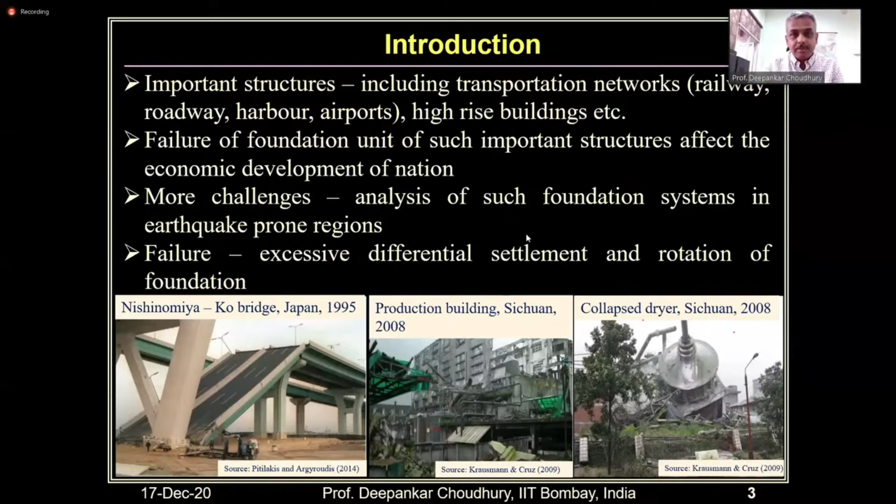We also know how the foundation unit is quite extensive. It is not that we only talk about building foundations as a geotechnical engineer, but we also talk about excavation close to existing structures or buildings, even tunnels, and so many other things also come under the domain of foundation engineering. We all are aware about it.

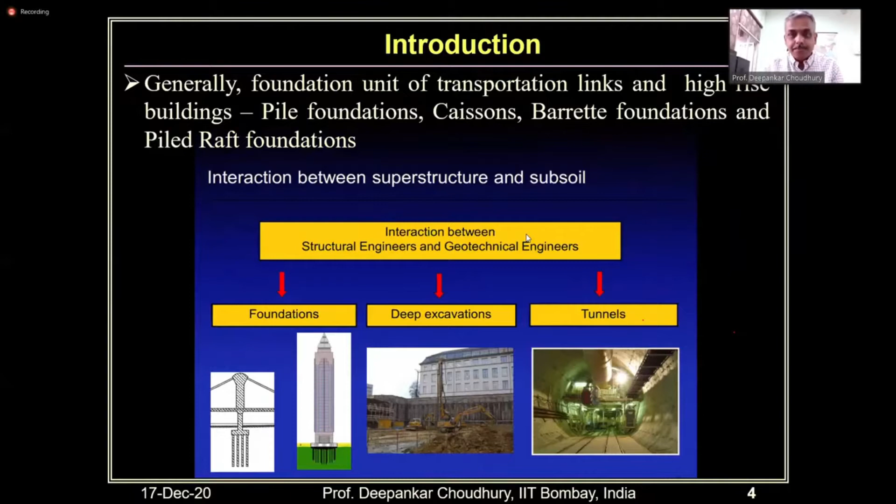And with the ongoing construction boom worldwide, we all know that super tall towers are essentially a present day scenario in urban cities. Across the world, we can see and are aware about this increase in the height of buildings.

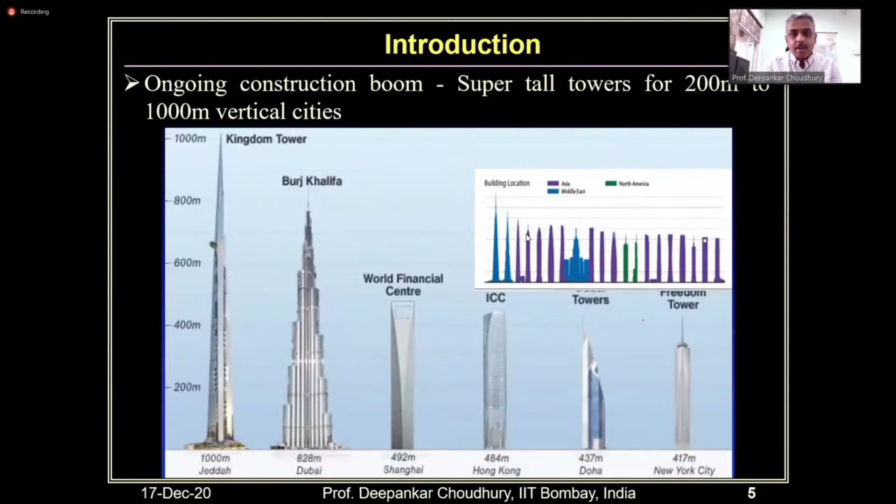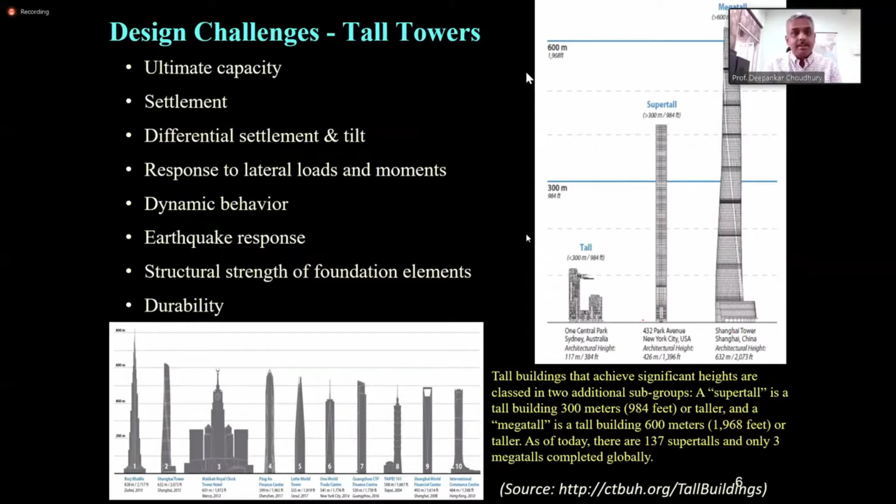Coming to this, what are the various challenges we face when we talk about such heavy or tall structures? Essentially, of course, its capacity, then settlement, differential settlement in terms of tilt, response to lateral load, moments - all these are parameters which we have to take care of as a foundation engineer. When it comes to earthquake-prone regions, additional parameters like the dynamic behavior of the foundation system, the earthquake response of the foundation, and structural strength of the foundation elements additionally get added to the challenges for which, as geotechnical engineers, we are supposed to provide solutions.

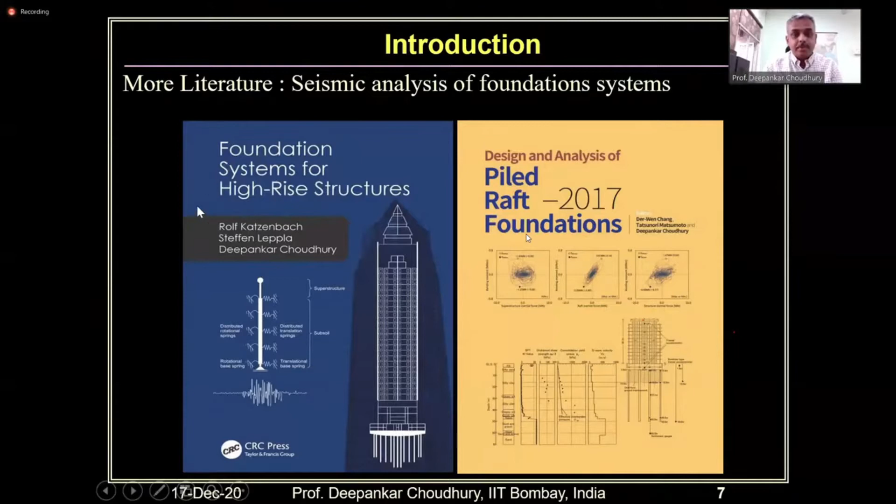Now, if we see the various literature available on this similar topic, I just want to highlight this book, where we tried to give the dynamic response of various foundation systems for high-rise structures. One can see through that.

Coming to the modalities of addressing this problem - how to address whether the foundation or the building or the structure which we are going to have is in a seismically low risk area, moderate risk area, or high risk area - is probably the fundamental thing we need to first identify. Because based on this identification, what types of testing we should start is very important.

I remember this morning, towards the end in conclusion, Professor Sitharam was mentioning that essentially geotechnical analysis and design, everything, the fundamental basic thing depends on major quality testing. He actually asked Professor Charles Ng that probably ISSMGE can take a lead in the form of the type of testing we give. So this is very important as well.

When it comes to seismically active areas, accordingly, whether it is only in-situ testing, or in-situ plus combined high quality undisturbed sample collection and then laboratory testing and site specific correlations - all these are essentially important to address.

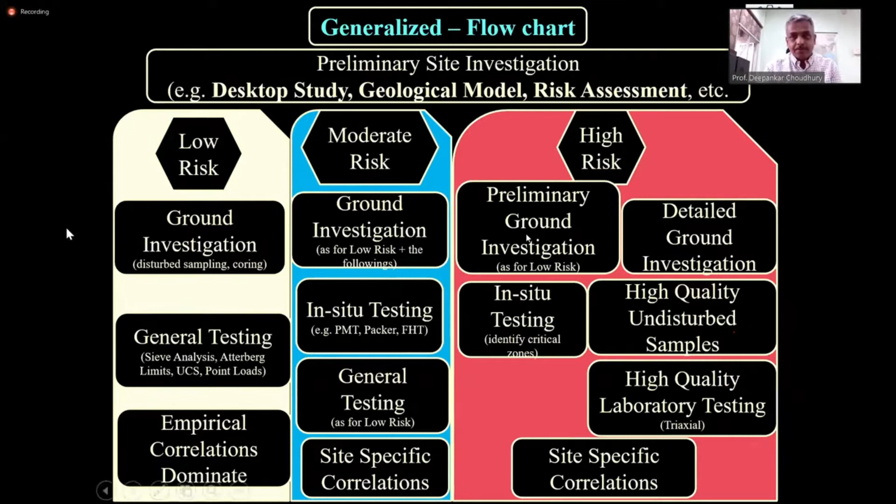So this essentially falls on the shoulder of geotechnical engineers or geotechnical earthquake engineers to check what type of degradation of that shear modulus is occurring in the range of cyclic shear strain to which your structure is subjected, or to which you want your structure to be designed. So essentially the stiffness parameter, damping parameters, Poisson's ratio, density of material - all these are important along with these things.

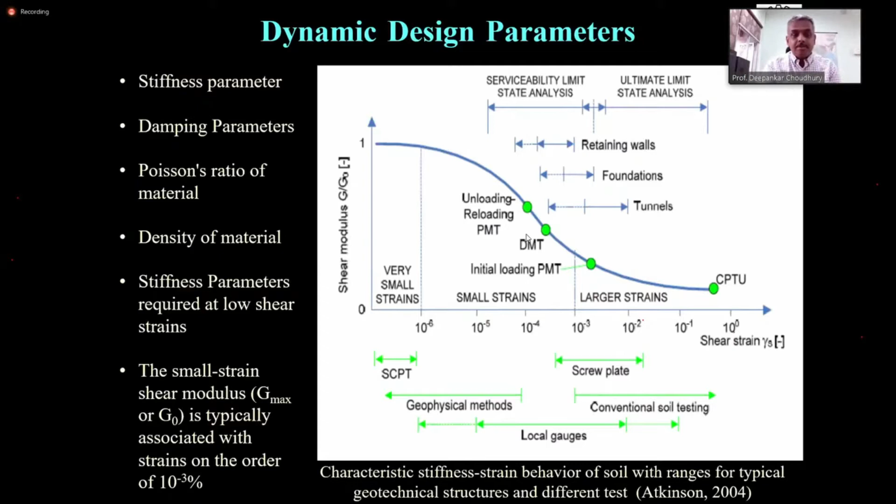Now, coming to the various components - essentially in today's talk I try to touch three aspects of foundation systems. This is the first case, the first foundation system which I am trying to present over here: foundation system one, which is pile foundation.

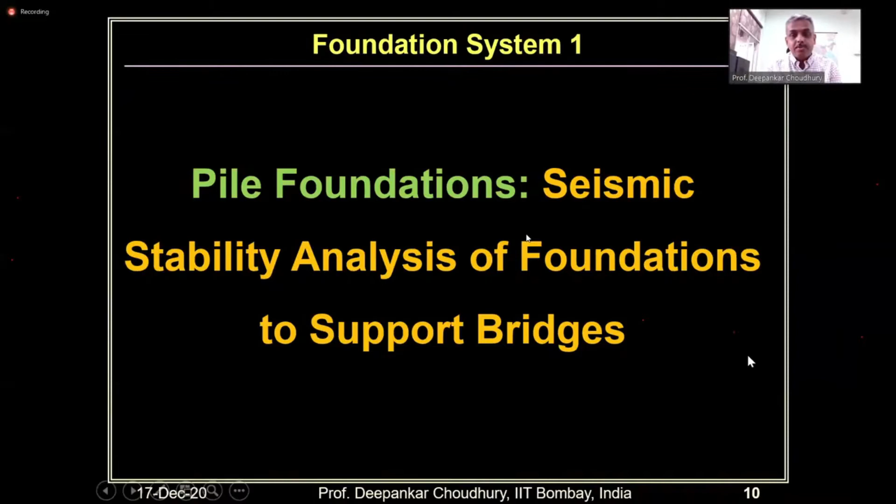We all know about how pile foundations need to be designed in earthquake-prone areas, etc., so I am not going into the theoretical detail of it. What I am trying to highlight today is a recent mega project in which we were involved - that project only, I am going to tell you how we addressed or solved this design problem of seismic stability of foundations to support bridges.

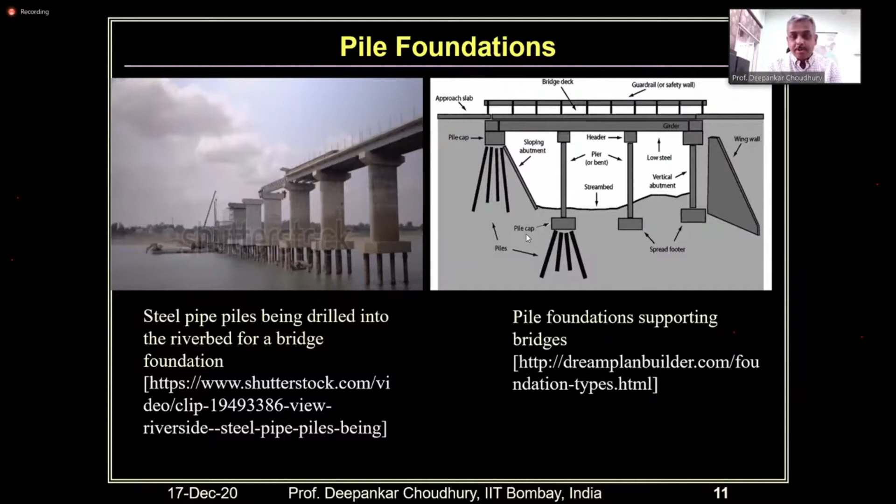As I said, I'm not going into the fundamental details of pile foundation because today's lecture is not on that essentially. So I am going to talk about this project which we handled at IIT Bombay, given by L&T, heavy structures and geostructure divisions of L&T.

This is the foundation for the Mumbai Trans-Harbour Link, MTHL, package one. There are three packages altogether. Remember, this is India's longest sea bridge, currently under construction, which will be 21.8 kilometers long. This is an MMRDA project, and various agencies and institutes are involved.

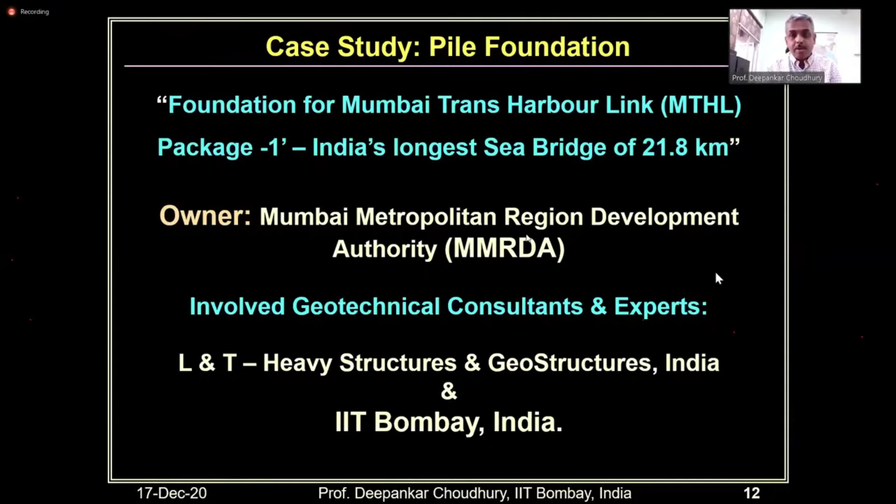I heard about this project in its preliminary phase when I was visiting Incheon National University in Korea with Professor Issy Shin. He mentioned and showed in a Korean newspaper that various companies were bidding for this project construction. Finally, L&T got it, and L&T Heavy Structure approached me for the seismic design component.

If you see the geographical location of this project, the Mumbai Trans-Harbour Link essentially connects these two islands. Mumbai is composed of 7 old islands, as you may know. So this connects Navi Mumbai and Mumbai, and this will be India's longest bridge, 21.8 kilometers, starting from South Mumbai's Sewri to Thane Creek to the north Elephanta Island.

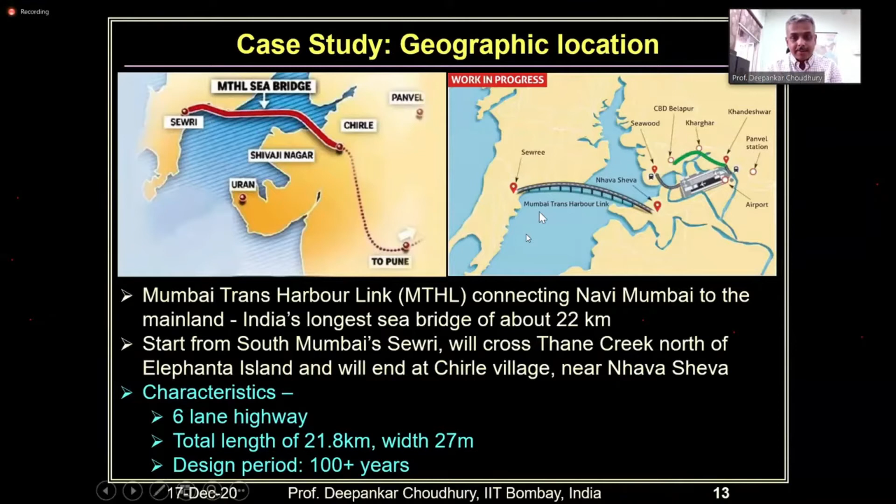I have visited the site also along with my students, and they found it a beautiful scenario. When it gets completed, you can see some part of the Elephanta Cave hill from this bridge. This will significantly reduce the traffic of Mumbai and the travel path also.

The architect of present day Mumbai city, as everyone knows, engineer Wilbur Smith, in '63 itself proposed this project, which at that time was named Uran Bridge. It was required for the development of Mumbai, and the cost estimation at that time was about 96 crore. But unfortunately, over the last 40 years, it could not materialize.

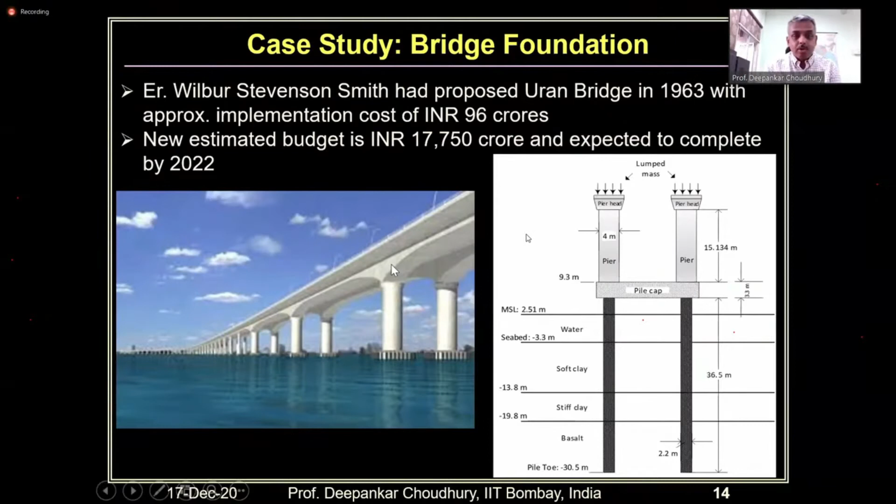Finally, the government decided that yes, it is very much essential for Mumbai. That's why the new estimated budget is several times higher after all those years. It is expected to get completed now by 2022. Actually, the pier level construction is all done.

If you see the soil profile, supplied by L&T to us when we were asked to do the seismic design, this shows the various layers. You can see the actual depth, very soft silty clay. Essentially, it is the creek region of Arabian Sea, so you can understand the standing water is there. Then you have very soft silty clay, then stiff clay, then residual soil.

In the Mumbai region, as you all know, probably at a relatively shallower depth than other areas like Chennai or Kochi, you get the rock at a shallower depth, about 17 to 20 meters or 25 meters, where you essentially get highly weathered basalt and such.

So now we started to classify the soil in terms of our dynamic analysis, and there we faced several challenges. As I mentioned, geotechnical testing is not given importance in many places, even in such an important case. They had done only SPT test, so only SPT N value was available. I asked whether they had done any kind of seismic survey test - no, nothing was available. So we had to estimate from available correlations worldwide what the various shear wave velocity values could be, and accordingly what the IS code classification would be.

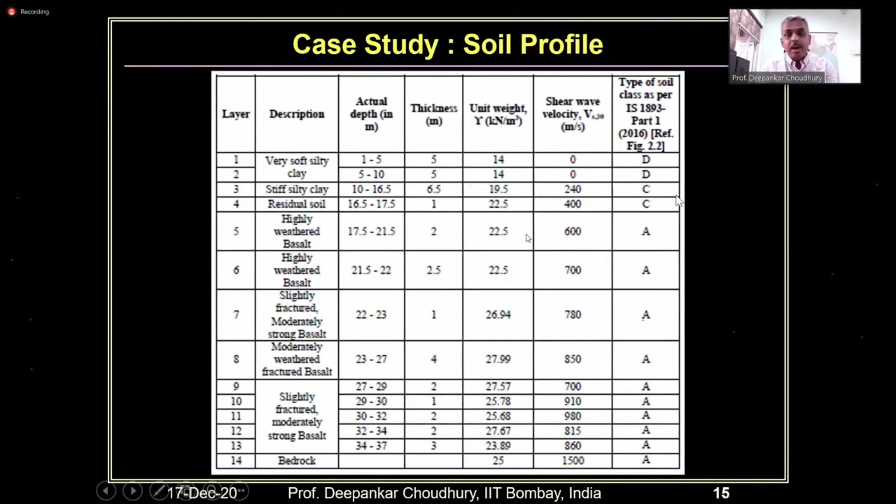The latest IS code fortunately gives the classification of soil based on something similar to the NEHRP guideline - class A, class B, class C, class D type of soil. Then we analyzed this MTHL project in two parts: seismic analysis via site response analysis using Shake 2000, and then we did the entire dynamic soil structure interaction analysis for the complete bridge foundation system using finite element software Plaxis. As you know, Mumbai is in seismic zone 3 as per IS code.

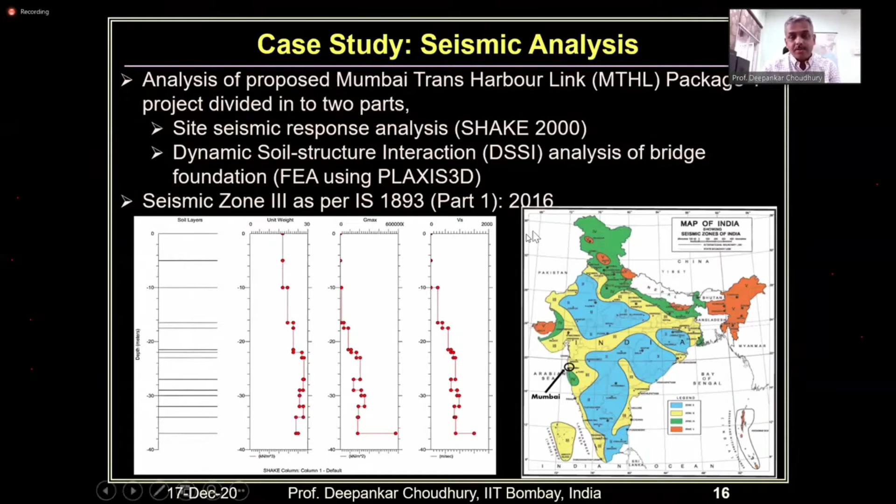These are the 8 earthquake ground motions that were given to us, developed by NGRI. NGRI did the initial seismic ground motion analysis for the site, and they gave 4 horizontal motions and 4 vertical motions for which the design of the foundation needed to be done.

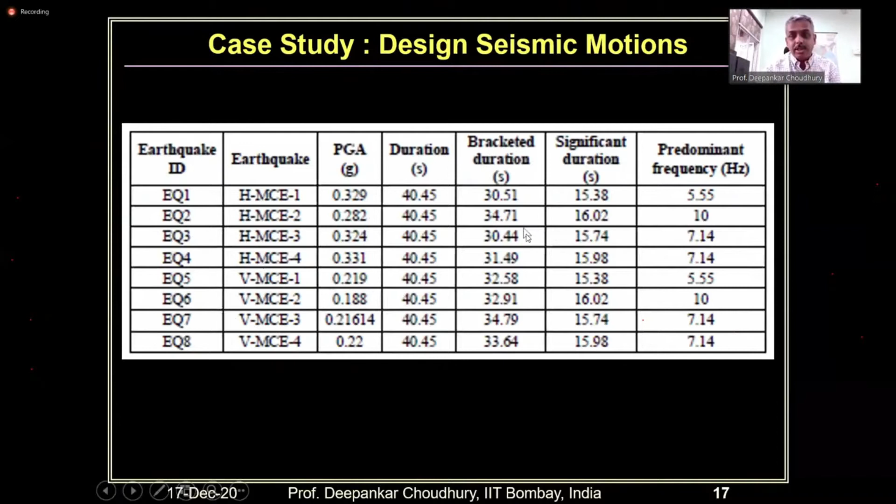So you can see over here the various values of PGA, duration, bracketed duration, predominant frequency, and so on. We carried out this one-dimensional equivalent linear analysis for in SHAKE, and identified the influence of amplification, since this is the creek region with very soft clay material, and we all know about Mexico City and other earthquake disasters. So amplification comes as an important parameter to consider in the design, along with damping factors, cyclic shear strain, and modulus degradation, which I mentioned earlier.

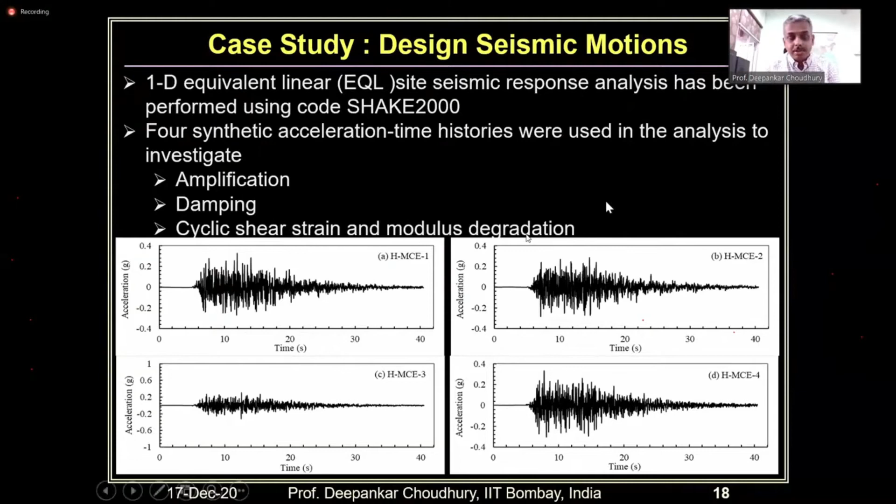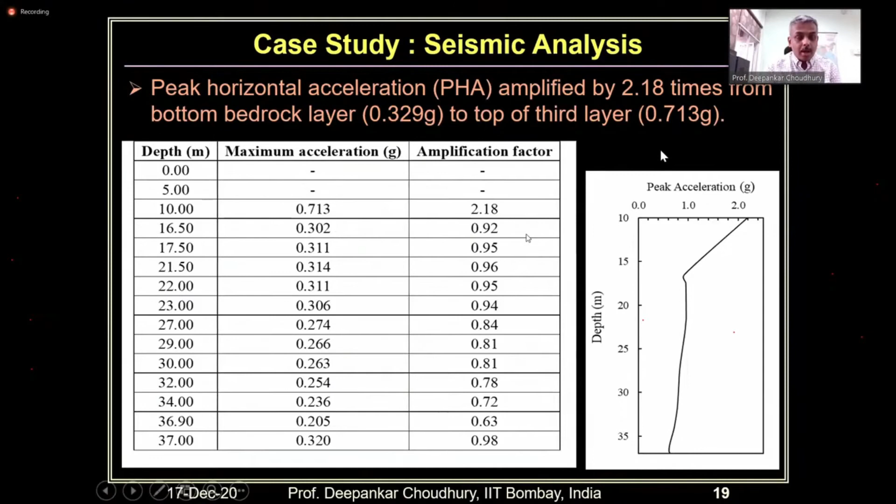After all our studies and analysis, we found a maximum amplification of about 2.18 times from the bedrock motion, depending on the worst case scenario of the ground motions that NGRI developed for the site-specific study for this project.

Then, after finding this out, the next study is the dynamic soil structure interaction for the entire foundation. The initial design for this foundation was done, and they asked us to check whether it is seismically stable or not. So the design is like this.

Each pier has a pile cap with 4 piles, 2 by 2. So 2 by 2 piles for each pier, and pile length is 36.5 meters, with diameter of each pile about 2.2 meters, which is relatively quite large. The piles are connected to a 3.3 meter thick pile cap.

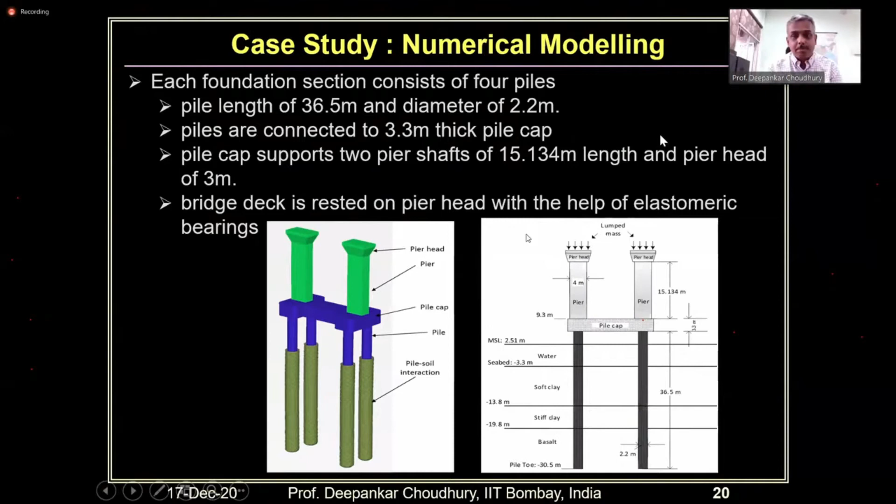The pile cap supports 2 pier shafts of 15.134 meter length and a pier head of 3 meters. The bridge deck will finally rest on this pier head with the help of elastomeric bearing. So that is the design arrangement.

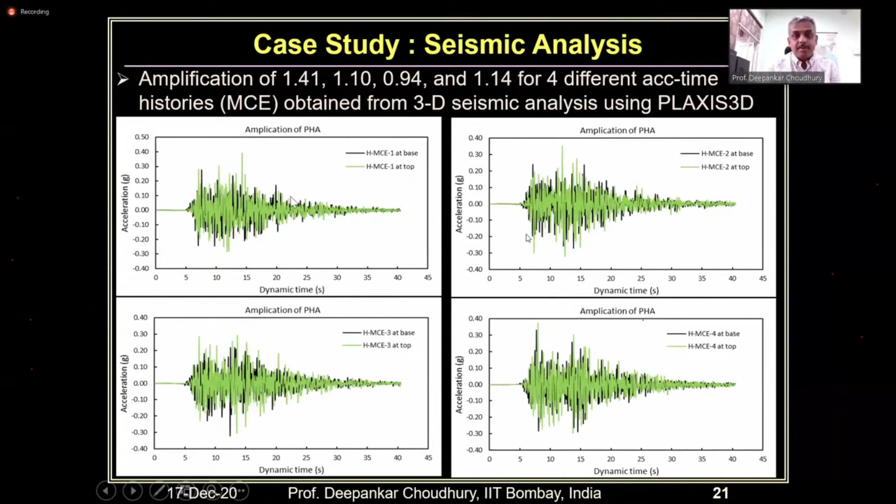After doing all the earthquake analysis, considering the maximum credible earthquake, MCE values, various amplification factors for different pier locations etc. have been obtained, and then the critical pier has been designed.

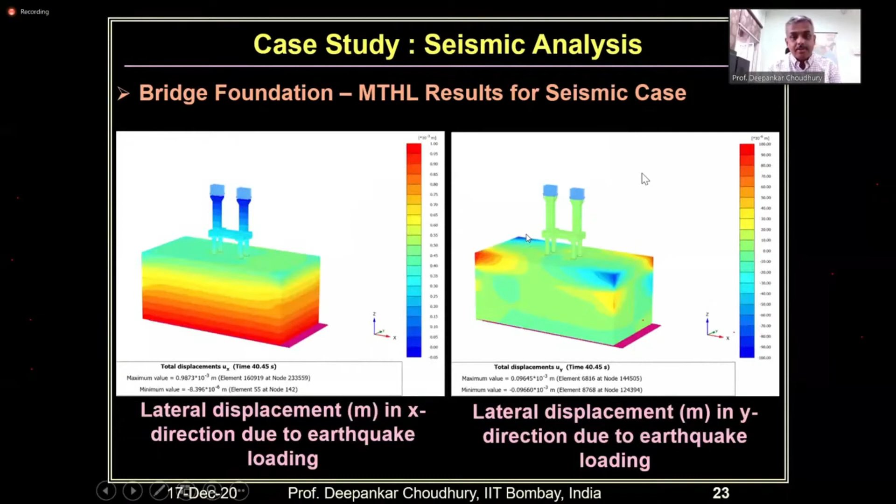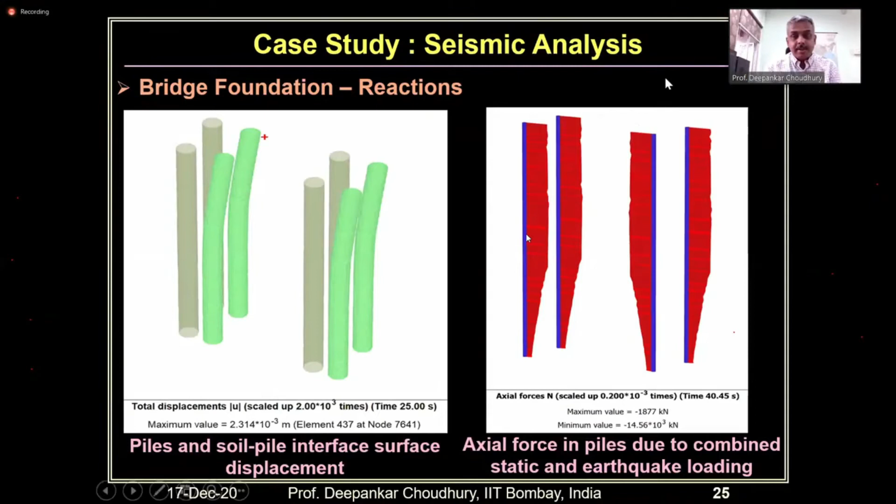So finally, our conclusion for this project was like this: site-specific seismic response analysis was carried out and actually considered in the seismic design. Then, one-dimensional equivalent linear earthquake analysis shows that the top 16 meters of clay is susceptible to significant amplification, and that should be considered for the bridge design, which has been given and analyzed.

Then detailed finite element analysis was carried out, considering the dynamic soil structure interaction. From the numerical analysis, it may be concluded that the existing foundation system proposed in the design phase is able to sustain the earthquake loading of this zone. With this, we completed and found that the response of the foundation system under seismic condition will also be within the permissible limit.

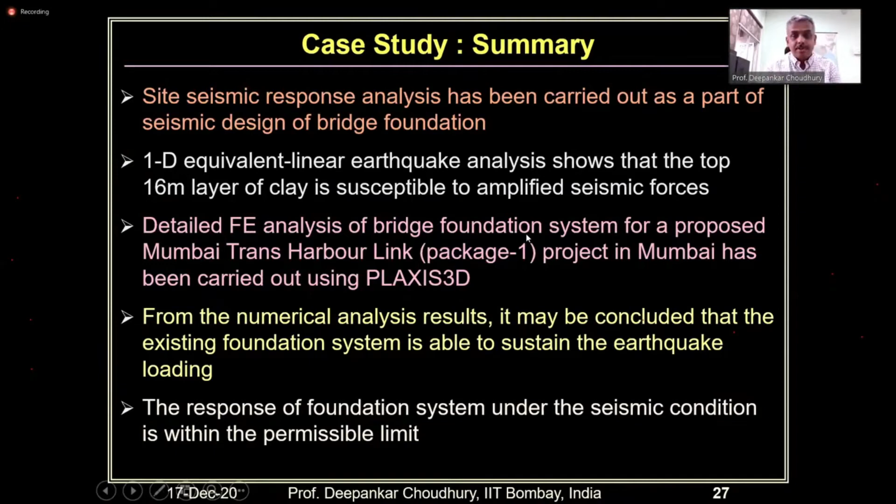So with that, our proposal was given, and when we went to the site, we saw that they have already constructed up to pier level, and everything hopefully will be fine, with a design life of 100+ years. Coming to the second category of foundation system, here we are talking about Barrette foundations for tall towers.

Barrette foundation for tall towers - this is relatively newer, in the sense of the last 10-15 years or so. And there are several advantages of Barrette foundations over conventional pile foundations for very tall towers.

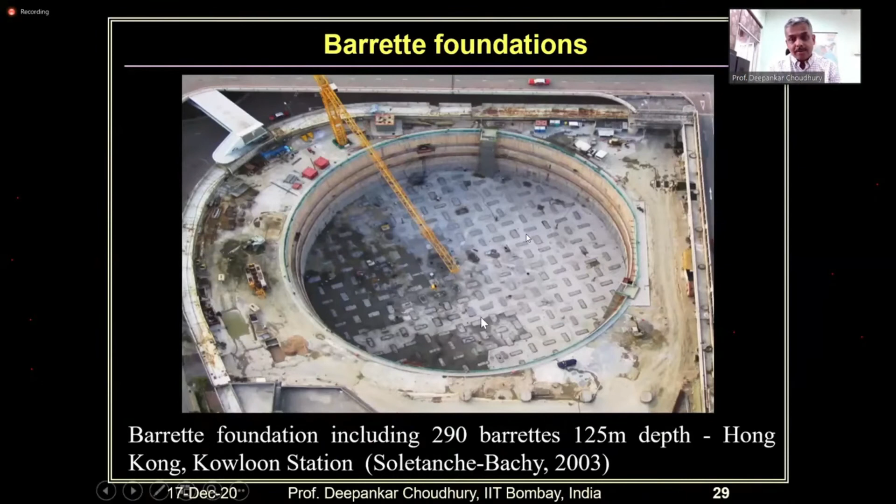So this Barrette foundation, you can see over here the picture. Okay, so this picture is talking about the Barrette foundations of Hong Kong in Kowloon Station. You can see the total number of Barrettes in this region is about 290 Barrettes of 125 meter depth.

What are the advantages of Barrette foundation? You can see these are cast in place reinforced concrete columns of square or rectangular shape typically used. This differs from the typical circular shape of the pile, and the method of construction also varies.

There are several advantages over bored piles, like being more suited for tall towers. The major advantage is essentially getting more skin friction components, so higher skin friction for the same equivalent sectional area compared to piles, you get in the Barrettes.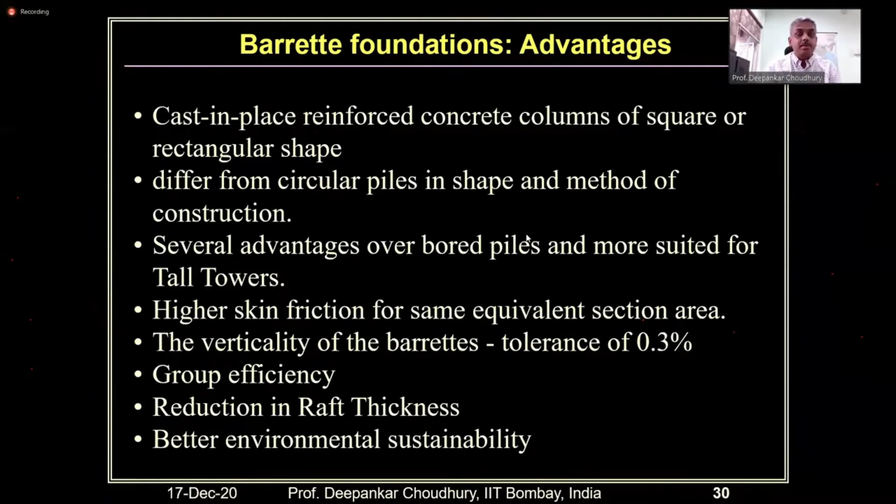The verticality of the barrettes has a tolerance of 0.3% given, and the group efficiency is also much better in case of barrettes. There's a significant reduction in the raft thickness instead of going for combined pile raft with piles, so better environmental sustainability because the amount of concrete will be less and the cost saving will be significant. I will come to that very soon.

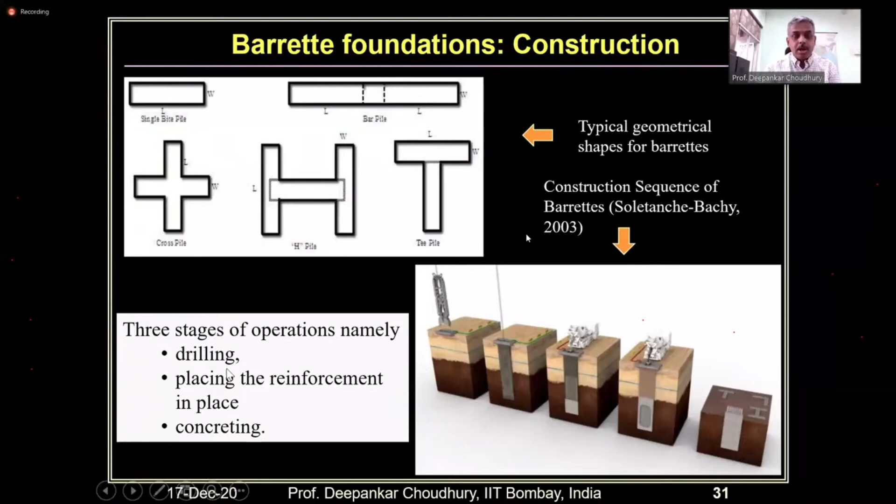So these are various typical geometries of the barrettes you can see, and this shows the construction sequence of the barrette, essentially a 3-stage operation: drilling, then placing of the reinforcement in place, and then finally concreting.

Here is one case study, actually done by Ms. Sujata Manoj, my PhD scholar, who was also a technical director earlier in the Dubai Fugro office. Right now she is in Singapore with Mott MacDonald.

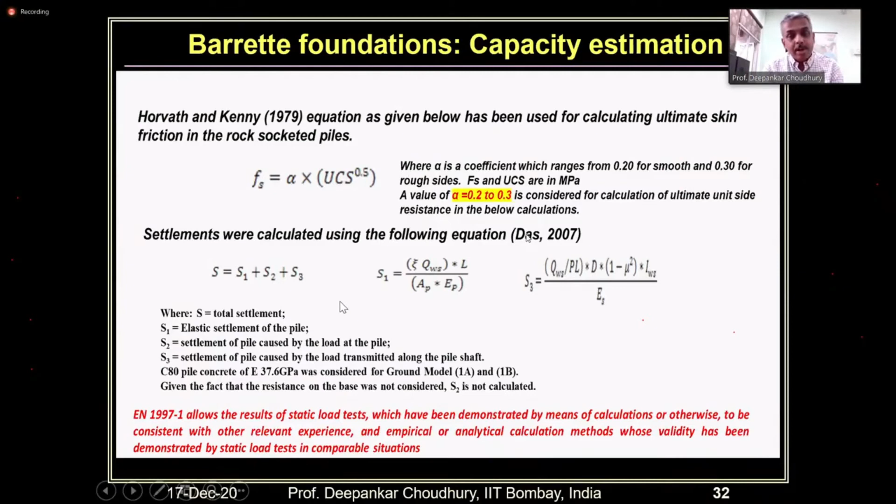The Eurocode 7 essentially suggests that it allows the results coming from the static load test to be taken, and then the Horvath-Kenny equation can be used for the ultimate skin friction computation in rock-socketed piles. Similarly for the barrettes also, similar equations are proposed or considered to be used.

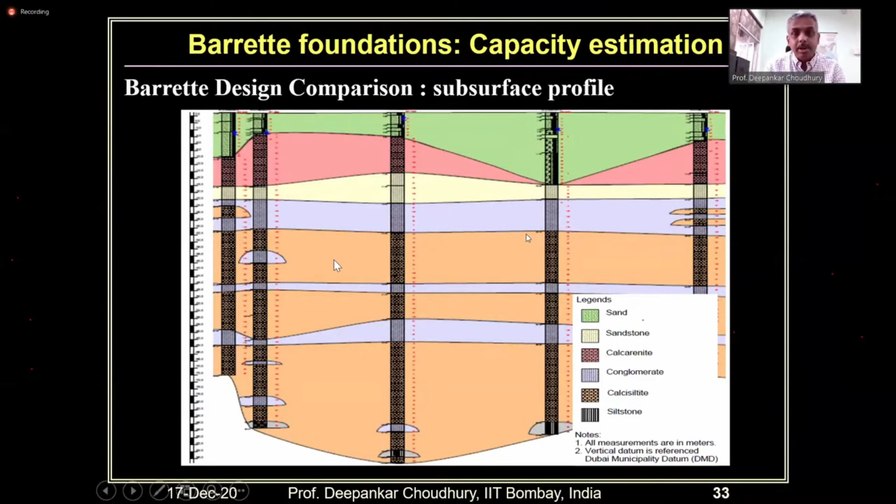So this is the site profile in Dubai, essentially for the La Mission Tower. Actually, the barrette foundation has been used there. You can see the various soil properties of the layers over here.

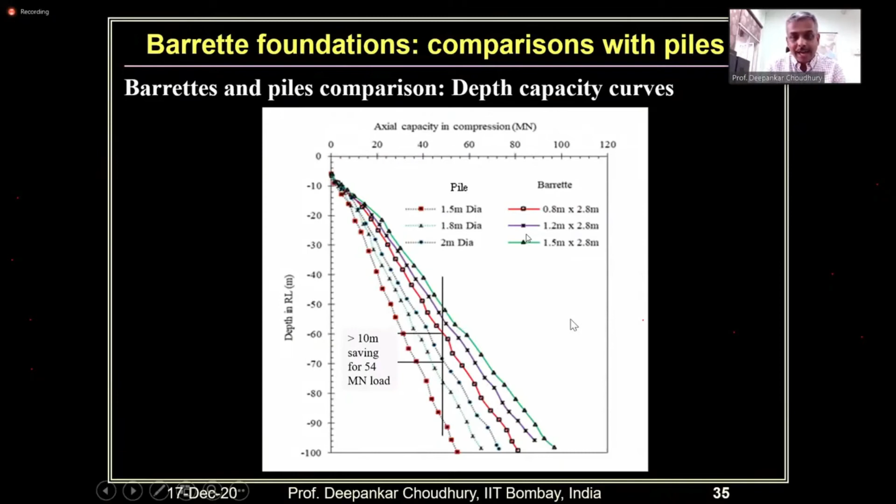So the dotted lines are for piles and the solid lines are for the barrettes. What it essentially shows, you can see even better here, the solid line is for the barrette and the dotted line is for the pile.

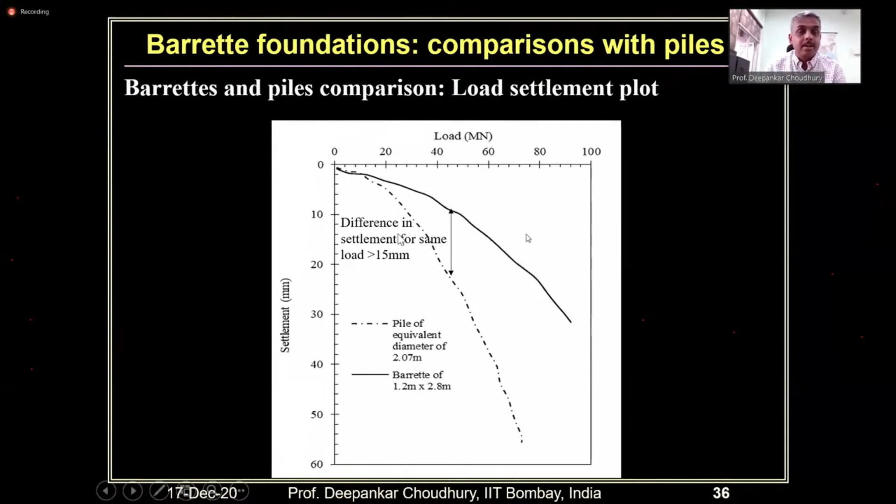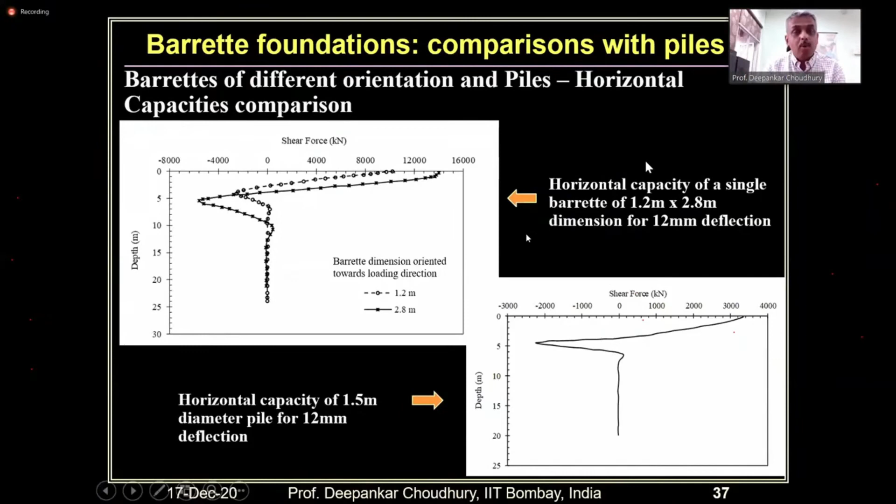So this is very advantageous, which I was highlighting. You can see laterally capacity-wise also, the barrettes are much more capable of taking more load than pile foundations. And there is a huge amount of saving of cost because of the saving of concrete.

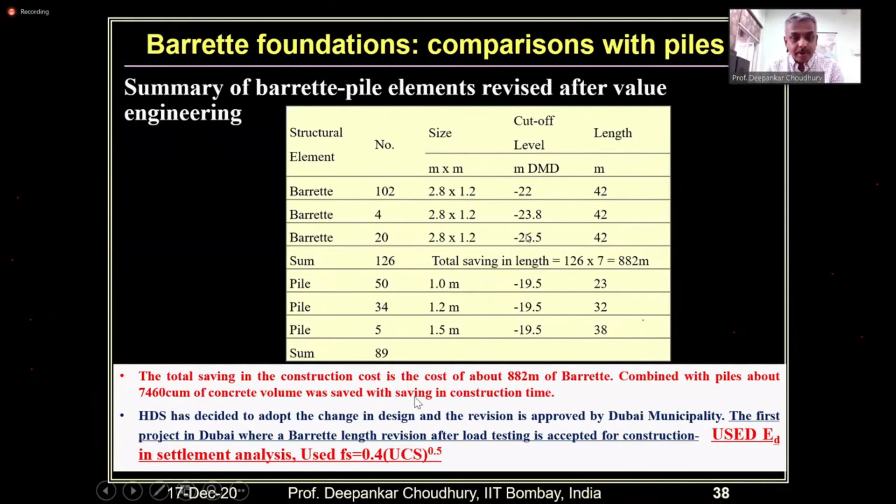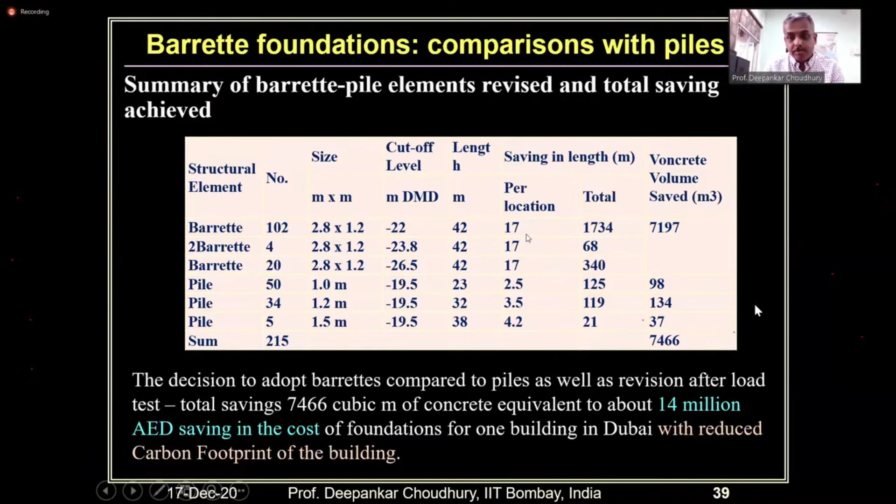You can see the cutoff levels etc. Altogether for this project, actually 14 million AED was saved finally in Dubai for this project in which Sujata was involved, the La Mission Tower.

So for the details, you can refer to our paper. It is available online, Proceedings of ICE Geotechnical Engineering, ICE London, UK. You can see how load cells etc. were used for analyzing barrette advantages for La Mission Tower.

Coming to the third type of foundation, which I am going to highlight here again from one of the projects which we have handled. I am again not going to cover the theoretical or fundamental aspects over here.

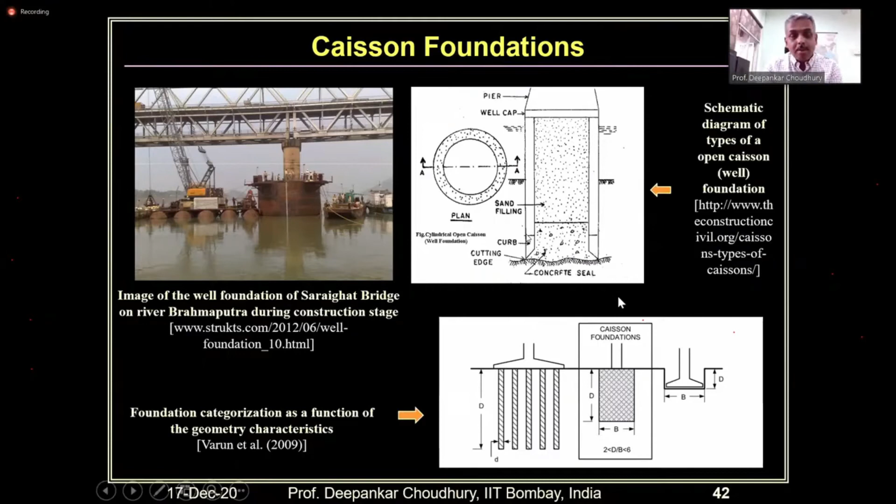And this Caisson foundation, we all know about its theory etc. So what I'm going to talk about here: we were approached by BRPNNL, that is Bihar Rajya Pul Nirman Nigam Limited, which is under the government of Bihar. They approached us for a bridge on the River Ganga in Sultanganj in Bhagalpur district.

For this bridge foundation, initially there were two sides, the owner side and the contractor side. They had approached two IITs, IIT Roorkee and IIT Delhi, and there was some difference of opinion. So finally they approached us to finalize the design philosophy and what implementation they should do in the design.

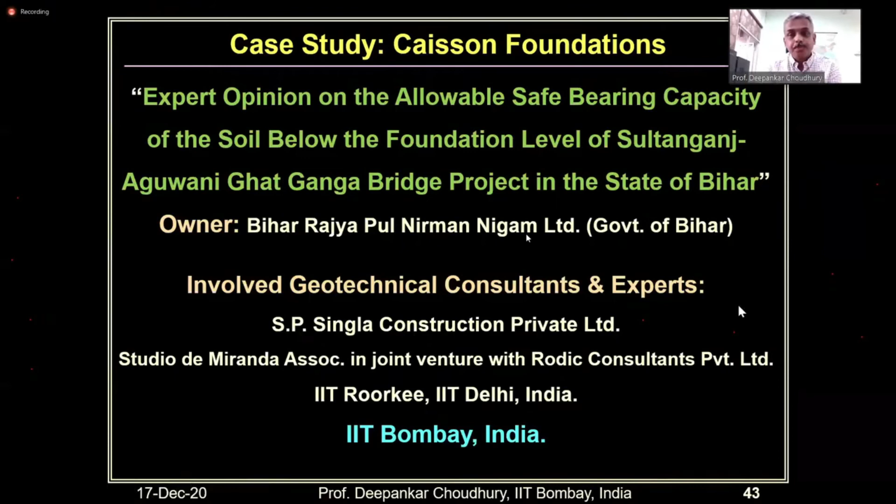So this is the 2x2 lane bridge in the River Ganga, and now this is complete. Actually, this is connecting between NH31 and NH80 in the state of Bihar. The length of the bridge is 3.16 kilometers.

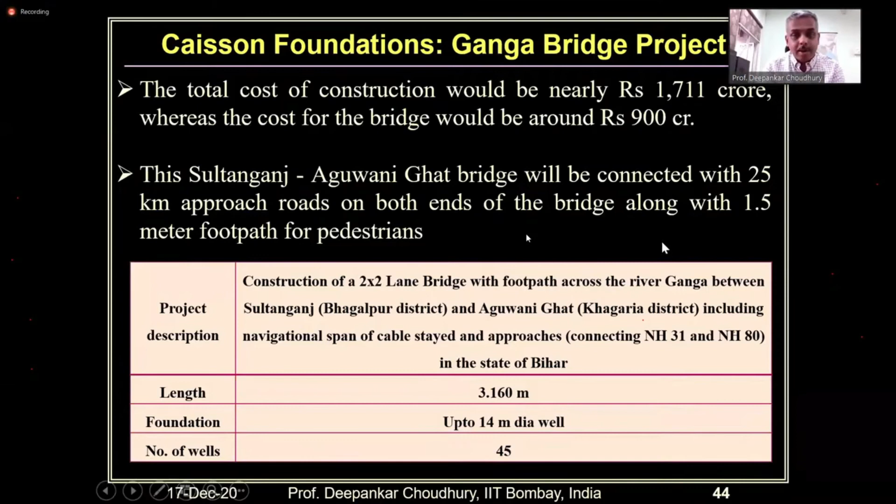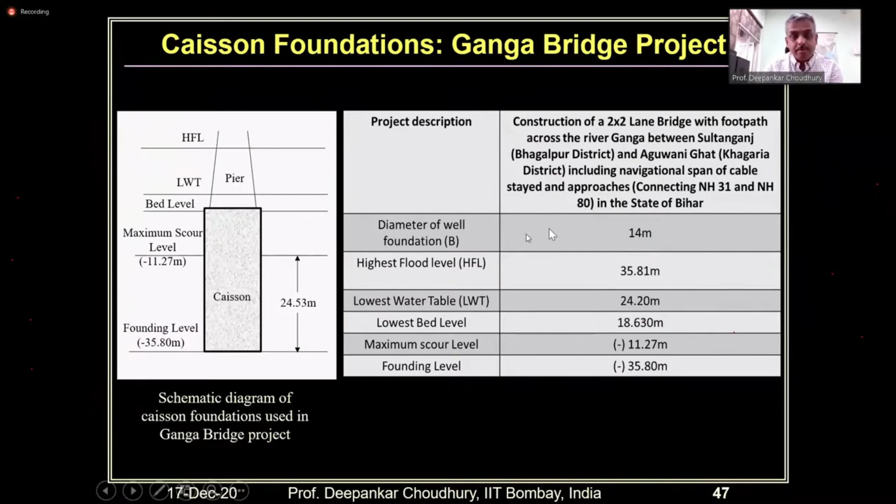These are various dimensions of that particular bridge and caisson foundation which has been shared with us. And we have been asked to check its seismic stability, because the Bihar state is in zone 4 of seismicity, and the seismic analysis is very important for that. So the mode of shear failure during the bearing capacity calculation, and then the safe bearing capacity arrived at, was depending on the value of phi and all those things.

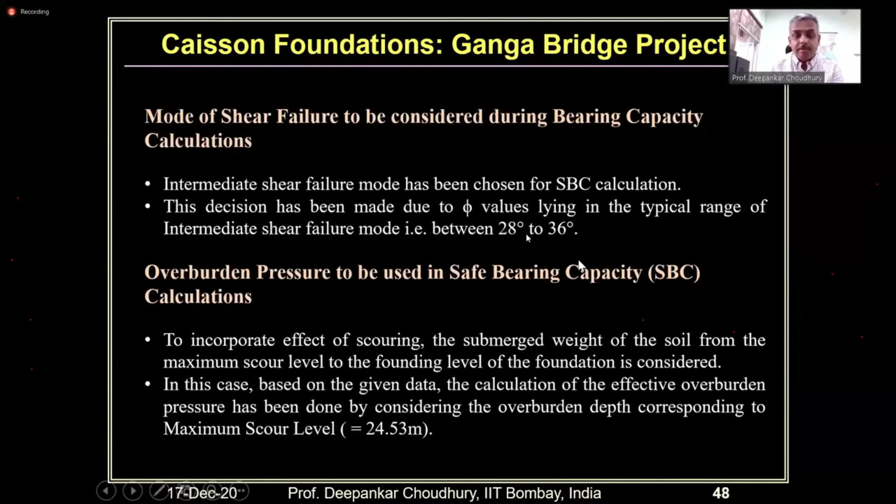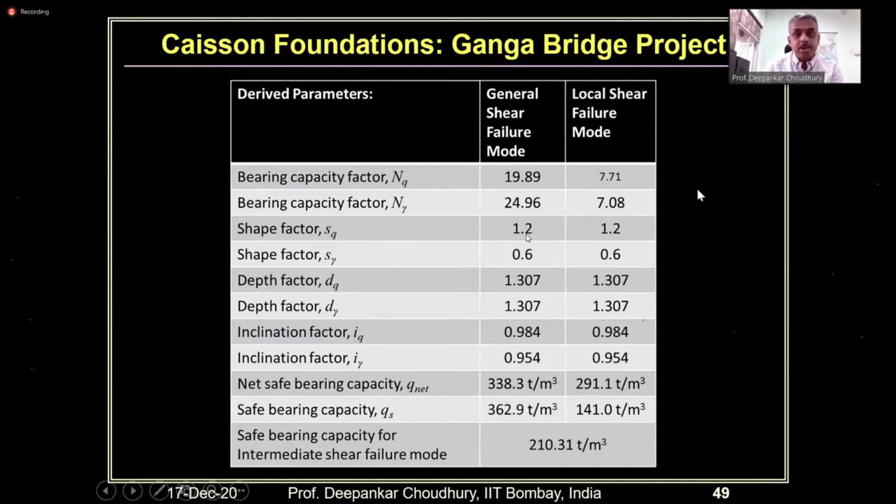Essentially, I will probably highlight the earthquake component. So the various bearing capacity factors in both general and local shear failure mode - it was actually the intermediate failure mode, so proper interpolation needed to be taken care of. This is what I was highlighting, how it behaves.

This is our analytical study. My ongoing PhD student, Mr. Shiban Mishra, is another author of this paper. He is doing work in this area, on how this caisson foundation behaves under earthquake loading conditions.

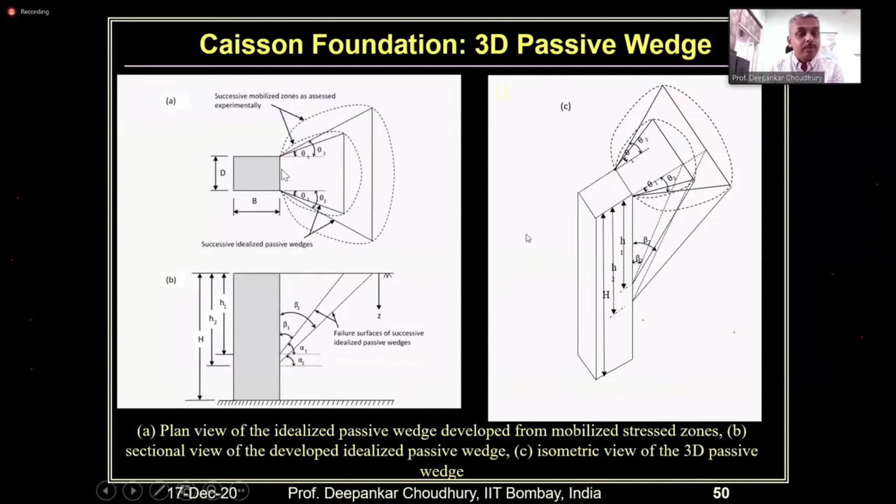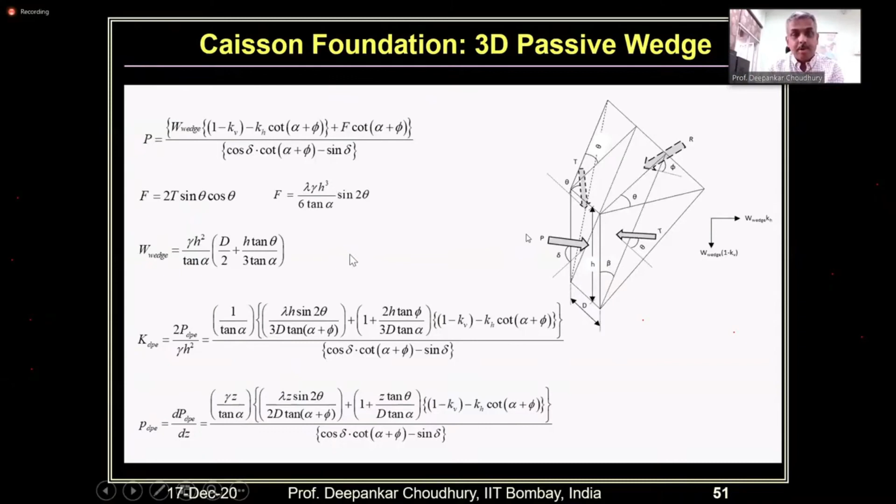Essentially, this is the three-dimensional wedge, how the passive pressure changes, and in turn that passive pressure always influences the friction factors when we talk about any such design. These are the details of the analysis - you can find the details of the equations in the paper. I'm not describing those things in this short presentation.

You can see the comparison of our analytical results with various other researchers' numerical results. There are two extreme conditions - when you don't consider any side friction and when you consider full friction. As you know, even recently there was in IGS forum discussion on whether to consider skin friction or not. Essentially, we generally don't consider skin friction, and on the conservative side we always don't. So for that also, you can see what closed form solution or analytical solution for this 3D wedge seismic analysis can provide from our study.

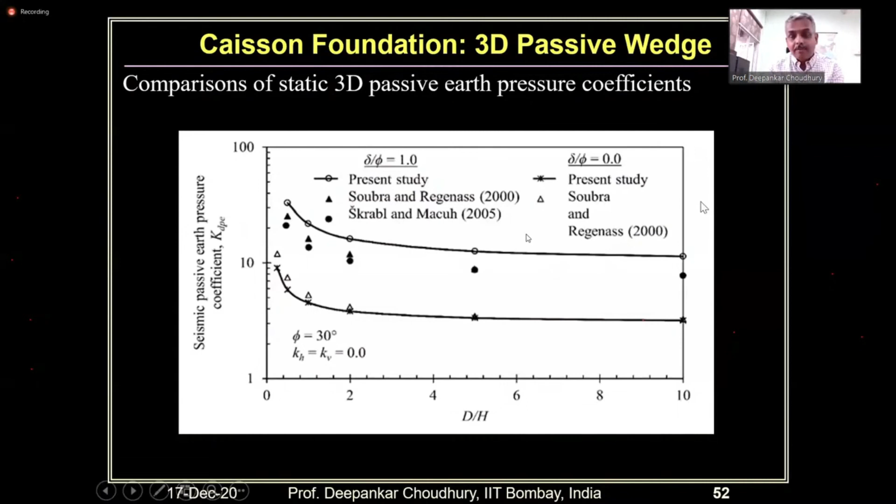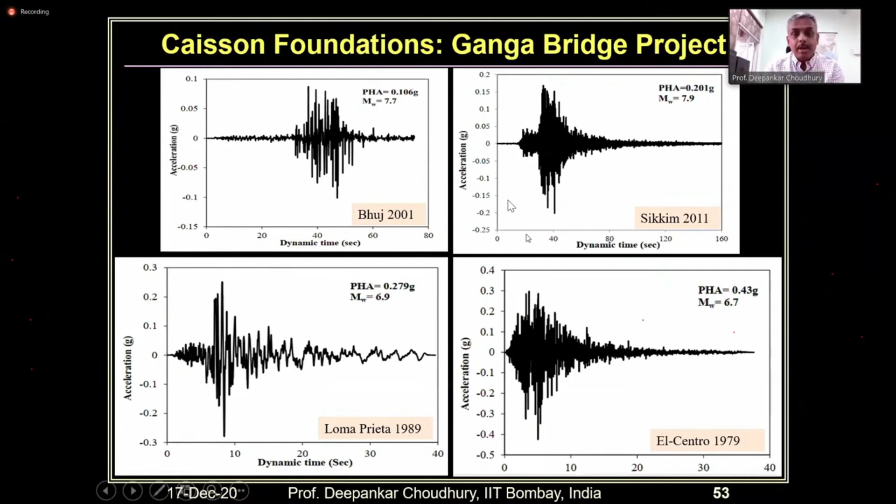After this analytical study, what has been done from our lab - Mr. Shiban carried out the dynamic analysis also under different earthquake motions, and studied how this caisson foundation behaves for that particular region, for what we were asked to do. These are the various soil resistance, normalized depth, etc.

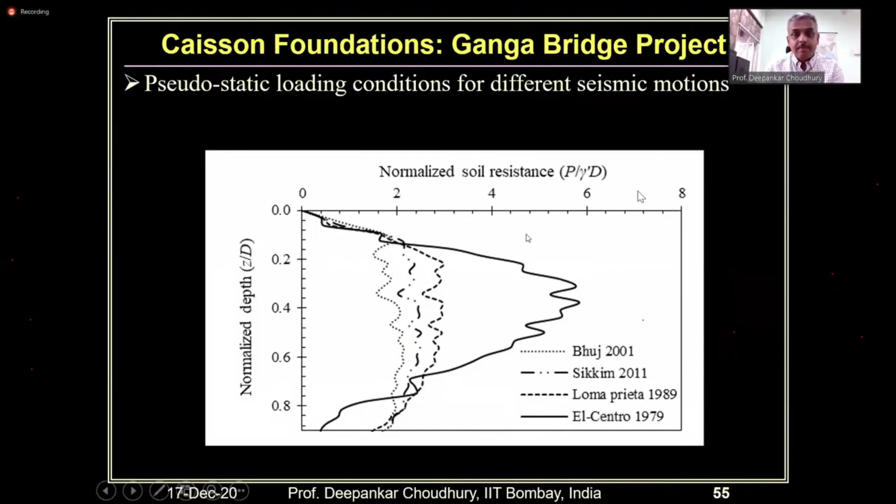The final conclusion from this project was that intermediate shear failure mode has been chosen for SBC calculation, and to incorporate the effect of scouring, the submerged unit weight of the soil from the maximum scour level to the founding level was considered. Initially we did the pseudostatic analysis for the caisson foundation, and then later we extended to Plaxis 3D analysis with dynamic analysis also, including different seismic motions.

From the numerical analysis result, we found that it can be concluded that the existing foundation system is able to sustain the transverse load coming from the seismic condition from the side. So that was the summary altogether.

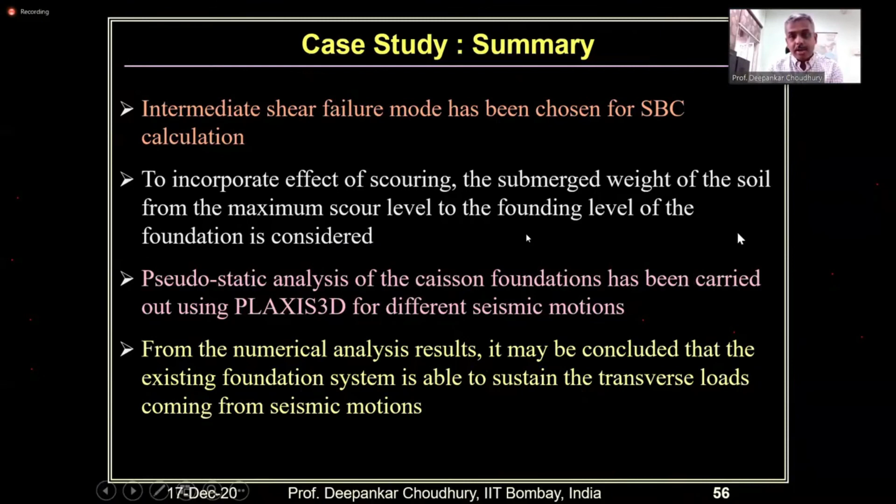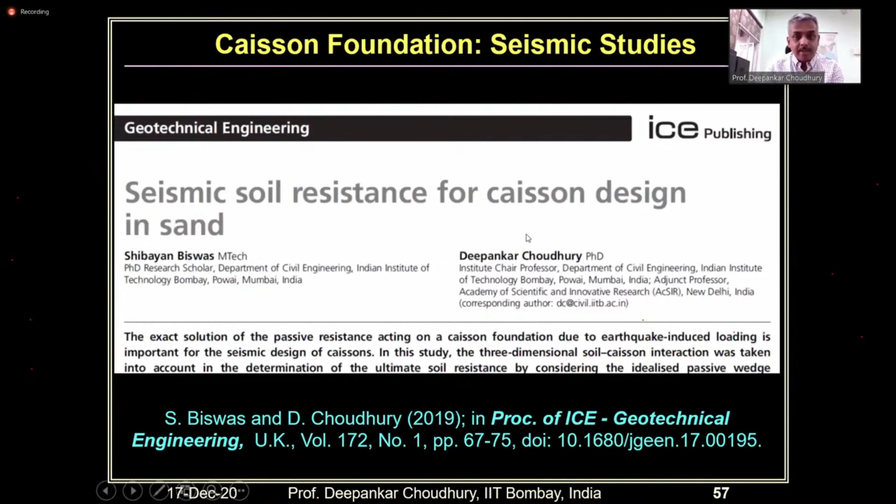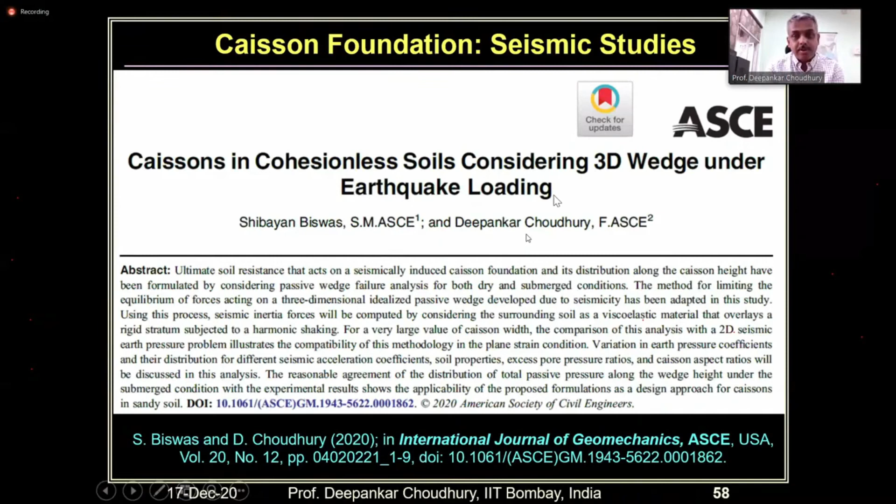For further details, if anyone is interested, you can refer to our paper. Last year, in 2019, this paper came in ICE Geotechnical Engineering, London - Shibayan, Seismic Soil Resistance for Caisson Design in Sand. And this year, in the present issue of the IJGeo ASCE paper, you can find this paper, Caissons in Cohesionless Soils Considering 3D Wedge Effect, what I was describing here.